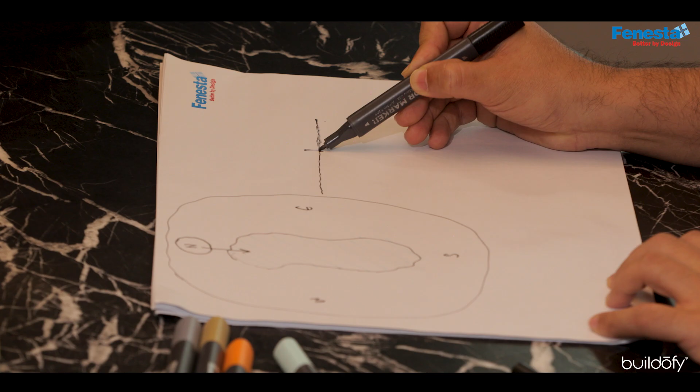Typically, when you look at the terrain, the approach was a parcel of land no more than half an acre, because half an acre was eaten away in a complete slope. There was a massive drop of about 60 meters, and then you had the lake at the bottom.

Every time we went to the site, we realized that if we sited the building above ground, the visuals we were getting were completely blocked. Not only that, but it looked as if the building belonged in any urban environment, it did not have a siting for that space.

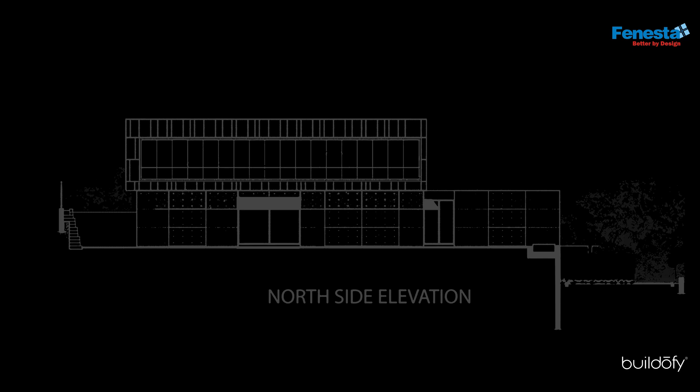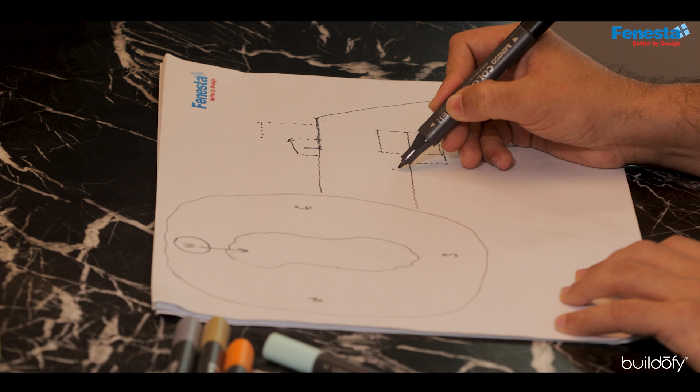So we took a conscious call and asked, is there a possibility that the earth plane shifts down, and we literally carve out the land to get closer to the lake at the bottom. By doing that, we were able to suppress one story below the road level and just stick out one story above the road level. As a result, the approach made it more humane to experience the structure, and we got a little closer to the views and the siting.

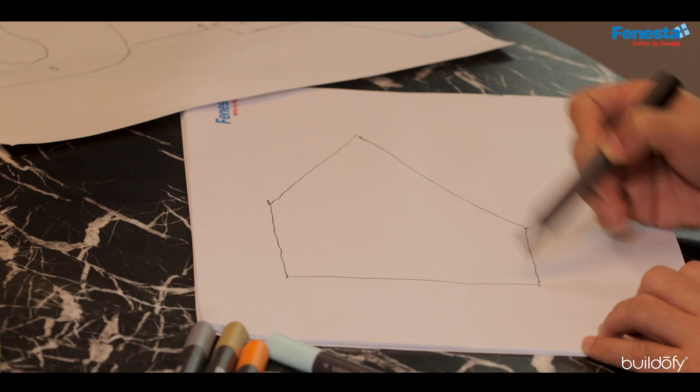What was very interesting in this project was that even though the client had purchased as much as an acre, we had only half an acre that could be utilized. The other additional half acre was a complete steep terrain, and that for us was a challenge.

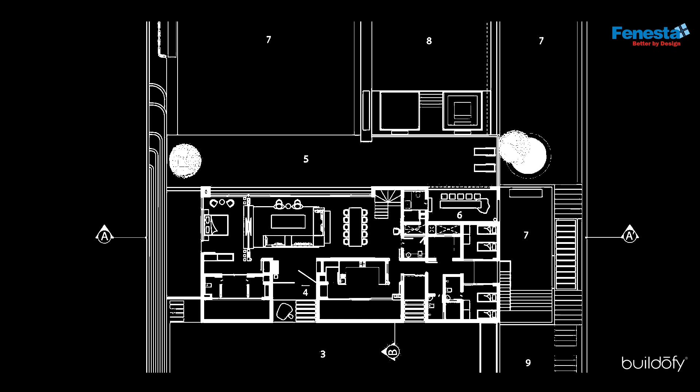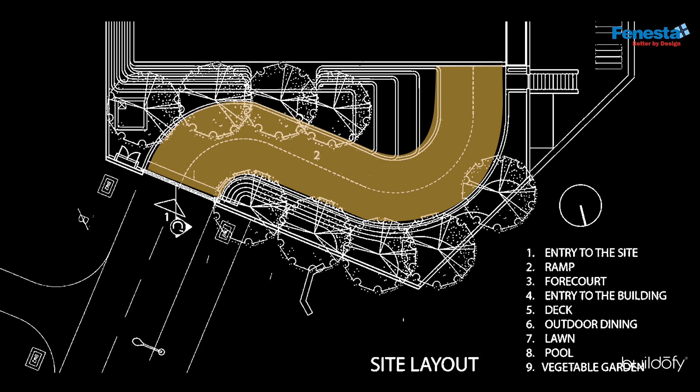Once we had decided that we wanted to site the building at the lower level, we had to come up with a plan for how to carve the ramp going all the way down, because this drop was almost 4 meters. This was important to understand, because this 4-meter drop made the ramp extremely steep to reach the final arrival plaza.

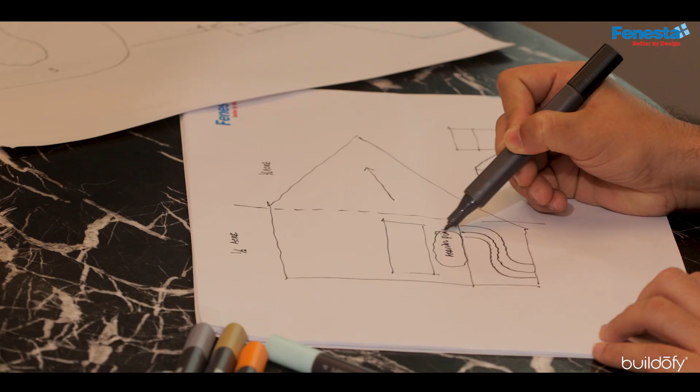Now, this was the first shift that we landed up doing. That's the shift in the plane. But critically, what we also realized is, in this building...

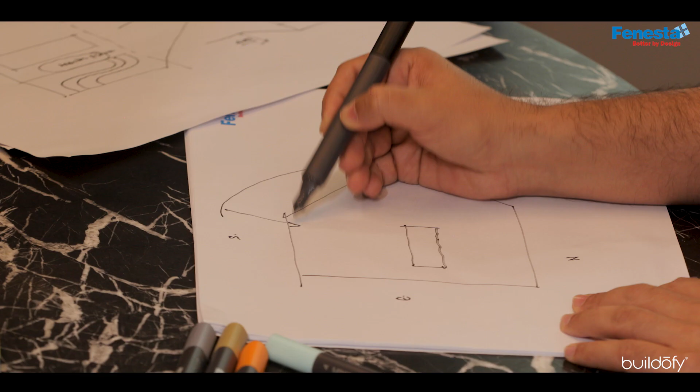That's the south. We were actually looking at all the environmental hazards becoming a huge issue for us, with the building placed right at the bottom and facing the entire fury of the southwest winds in terms of rain, and also the sun, which moved its path from east to west. The entire south face was now going to take a tremendous amount of beating. So how are we going to compensate for that?

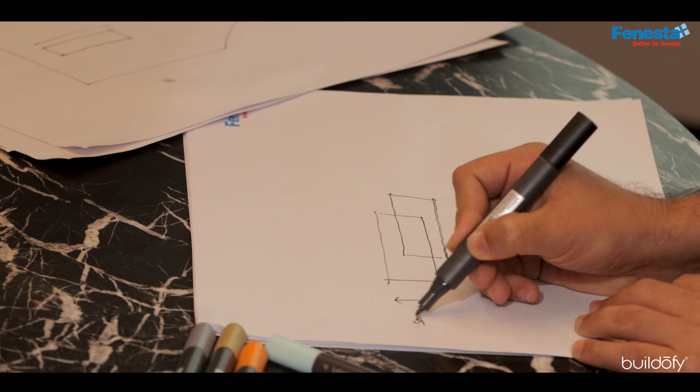And that began the exercise of the second shift. So what we landed up doing is the first mass, which was located on the lower level, the upper level saw the building move more towards the south, and it moved more towards the east. By virtue of creating that, we landed up getting these overhangs in plan, and these overhangs became the necessary protection for our structure.

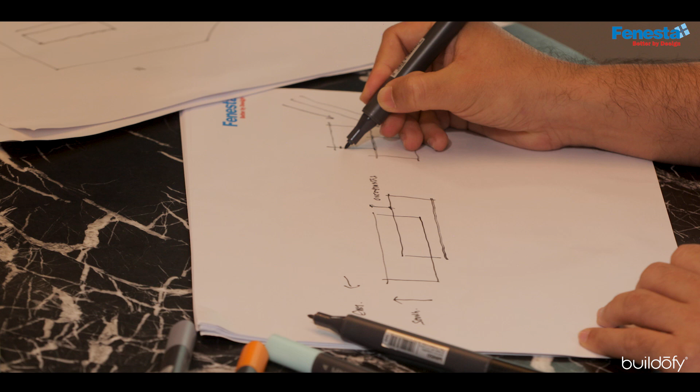from the rains and from the sun. What we landed up doing is to create these brise soleils, or what we like to call as the jalis and the screens. This was critical because it was not only providing protection from the weather, but at the same time, the 2 balconies that existed at the upper level, they got their view, which was uninterrupted, but at the same time, they were shielded from the weather. And this was very important for us.

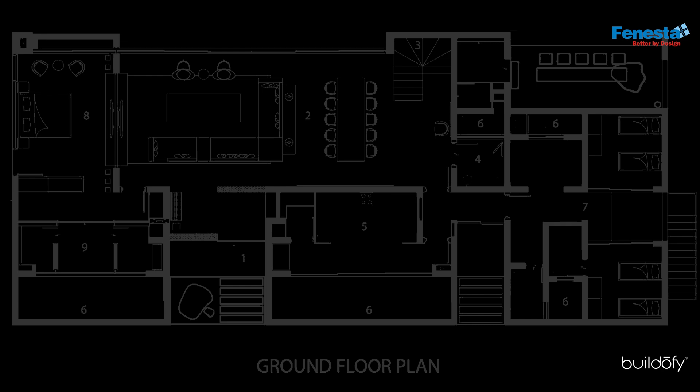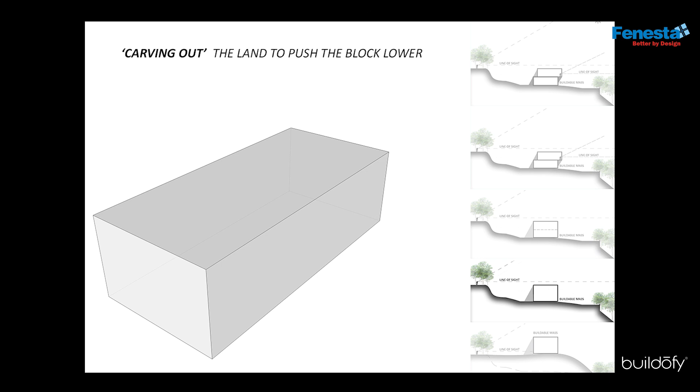What the shift also gave us, and this was exciting for us, is it created these light wells. These light wells became the green pockets for the master bathroom as well as for the kitchen at the lower level. The first shift of taking the volume 4 meters down and also shifting the upper block over the displacement of the lower block - I think these 2 shifts gave us the intention of the concept of the house, which is why we called the house and coined it the shift house.

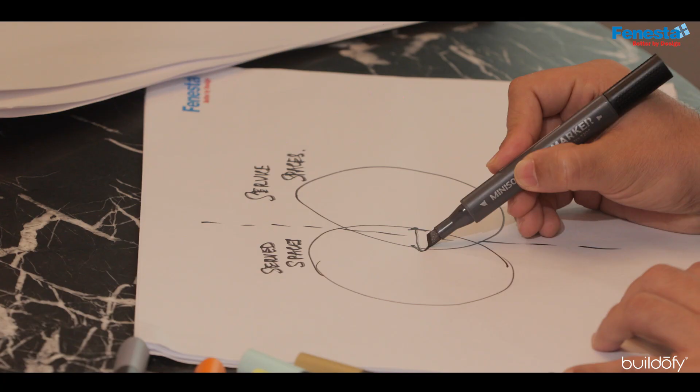When designing luxury spaces, it's almost similar in nature to designing it like a hospitality project. It's very important to understand that the served spaces and the service spaces have a defined threshold, and the overlap between the two should be kept to a minimum.

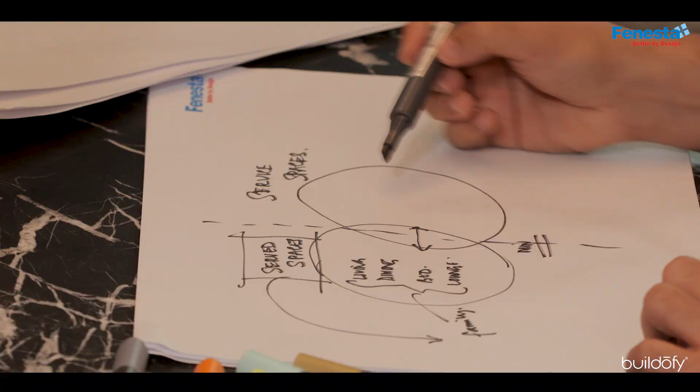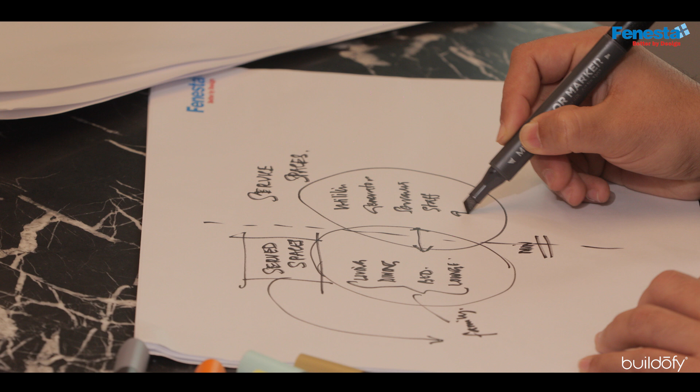For us, all of that includes the living room, the dining, the bedroom spaces, your lounge, everything which is where the family is going to be entertained. The service spaces at the other end are your utilities, or for that matter, the servants and the staff quarters. Now, once you've identified how the served spaces and the service spaces are going to interact, we call this exercise adjacencies, right? And it's very important for us to get this right, because this begins our exercise for design.

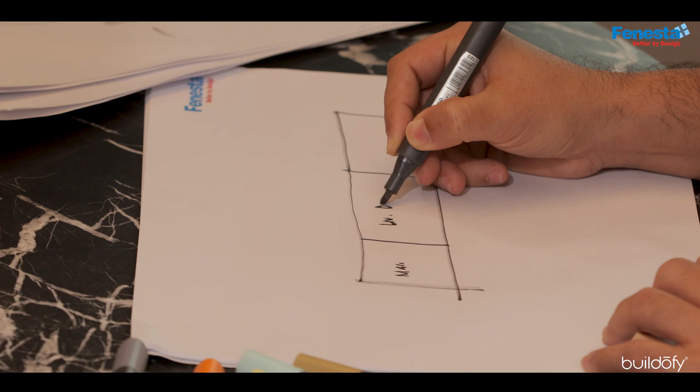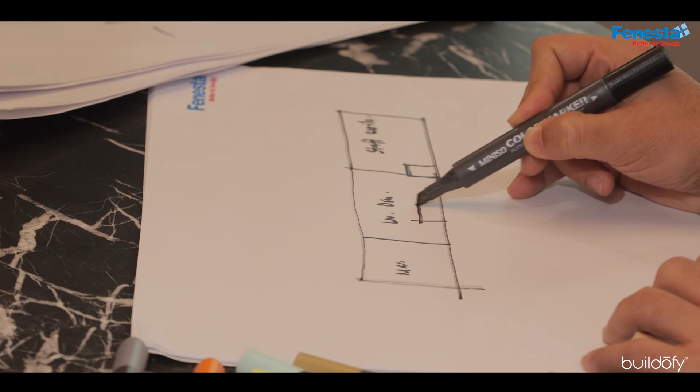So what typically began as an exercise of first lowering the structure down, we realized that we had three distinct areas that were created at the lower volume. We had the master bedroom, we had the living dining, and we had what we would like to call the staff and utilities. So this got defined by a small gesture entrance, whereas this had a rather appropriate gesture that was created once one came down from the ramp. And the canopy kind of gets integrated into this entrance to further accentuate what is the main entrance of the house.

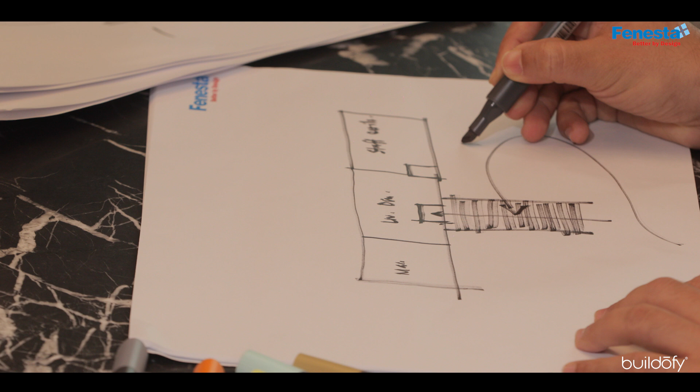Again, to highlight, living in the tropics is all about creating those thresholds. So this was our first threshold - this is where you come down the ramp and you have what we like to call a pause moment. The second pause moment that one is able to experience is the entire deck that runs the length of the lower block. This is your second threshold.

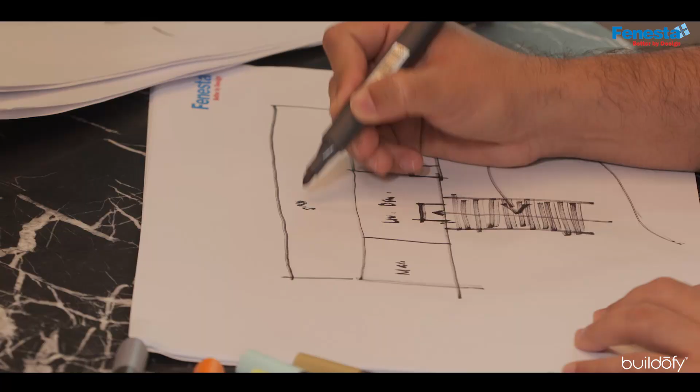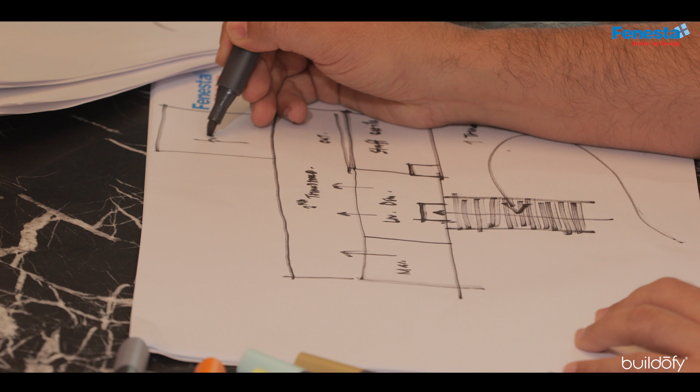This is where life happens in the tropics. You're able to come out from the master bedroom, you're able to come out from the living dining. The staff quarters turns its back, but we were able to create an outdoor dining out here, and attached to this was our pool. You had the lawn, which seamlessly allowed you from this threshold to be accessed, and all of this faced the lake beyond and had the vistas of the mountains that were there.

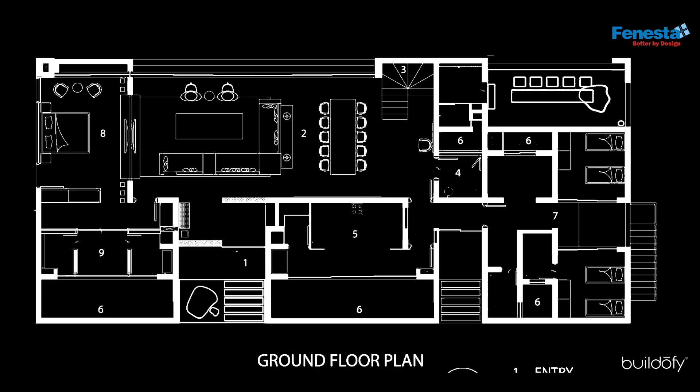The way the upper block works is that there is an overlap that happens with the lower volume, and this overlap is critical. This overlap takes care of the staircase that takes you to the upper level.

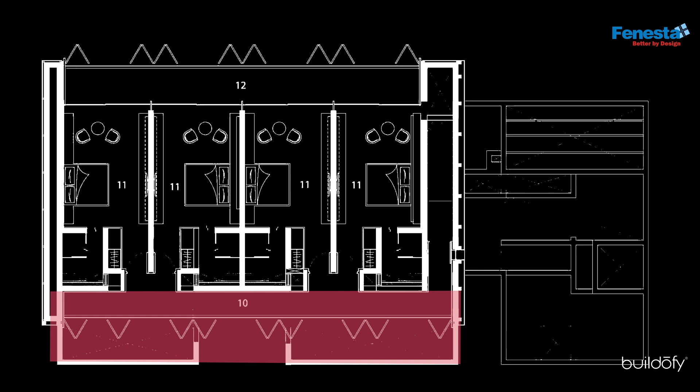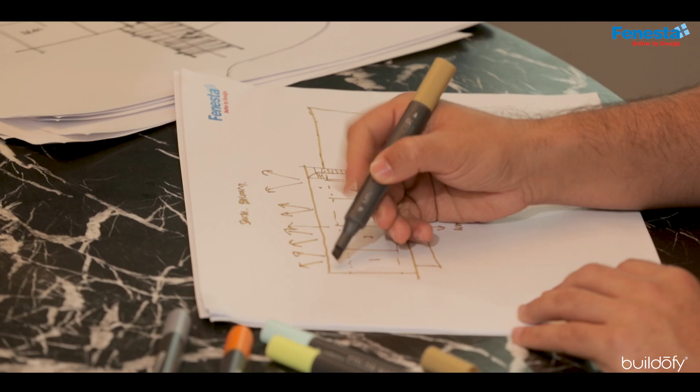What we have done here is that the entire south side has a balcony, as well as on the north side, there is a veranda. Now, this is important because the veranda on the north side allows you to enter the functions at the upper level, which is typically 4 bedrooms. Each of these bedrooms has a balcony access from where they can enjoy the vistas. But at the same time, if they want to be enjoying each other's company, this balcony is their space where they can congregate.

At the studio, I think we're very conscious of the fact that we want to show restraint when selecting our materials. We also want to make sure that the architecture is honest. So if you look at the shift house, the lower volume is built in concrete, and the same concrete is an experience that you not only experience from the outside, but you also experience it from the inside. So it's a little bit of a seamless experience that one gets.

The upper volume is actually built in stone. So this is a forest green, river washed cladding that we'll put onto that other volume. Now, the purpose for choosing this particular material was also where we are siting it and where we are building it. It's built in an environment which is flushed with vegetation and green. We wanted the structure to camouflage with the surrounding.

So besides the use of concrete for the lower mass and the forest green for the upper block, one notices that there is a use of this bamboo wood which has been used in accents for the brise soleil screen. It's also been used for the pergolas and the drop-off canopy that happens at the entrance.

Another interesting use of river washed material was the river washed grey granite. You see it in strips being used all along the ramp and also on the decking. It's been used in these 2-inch strips strategically because we wanted to further reinforce the length of the building. So the idea was to kind of put it parallel to it, and you can see that being utilized.